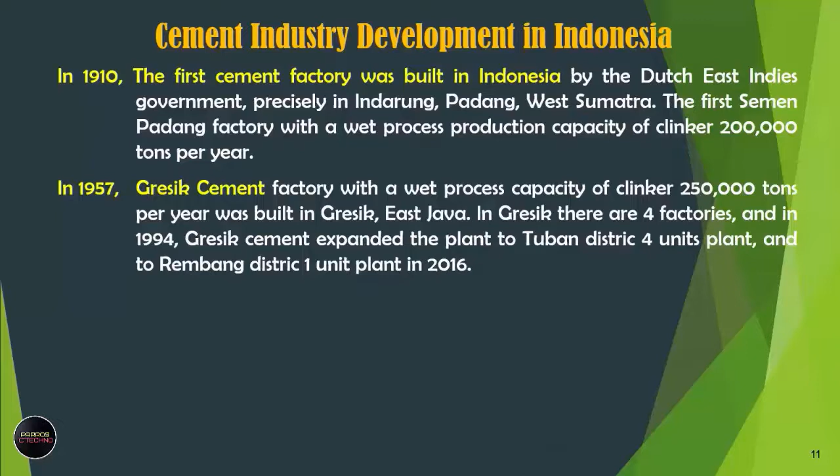In 1957, the Gresik cement factory with a wet process capacity of clinker 250,000 tons per year was built in Gresik, East Java. In Gresik there are 4 unit factories, and in 1994, Gresik Cement expanded the plant to Tuban district with 4 unit plant. And in Rembang district in 2016, 1 unit plant. Currently, Gresik Cement has a total capacity of 11.9 million tons of clinker per year. Meanwhile, the Gresik factory which uses the wet process is no longer in operation.

In 1968, the Tonasa Semen plant with a wet process capacity of clinker 120,000 tons per year was built in Tonasa, South Sulawesi. Currently, Semen Tonasa has 4 unit operating plants with a clinker production capacity of 5.98 million tons per year. The Tonasa Unit 1 with the wet process is no longer in operation.

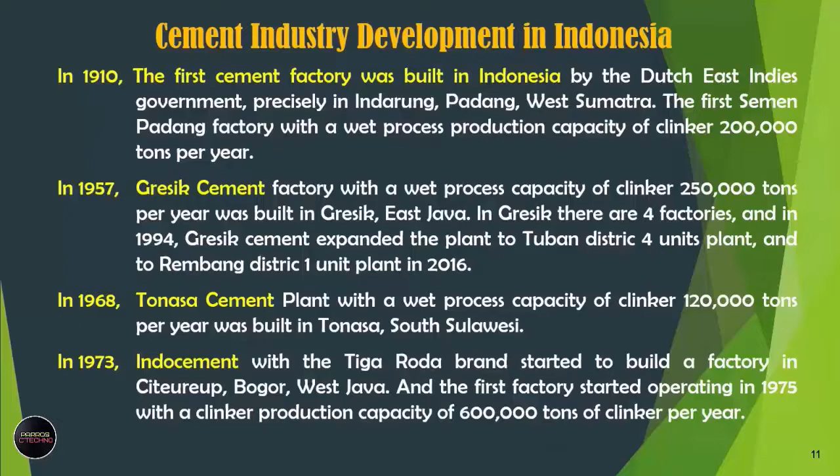In 1973, Indocement with the Tiga Roda brand started to build a factory in Citeureup, Bogor, West Java. And the first factory started operating in 1975, with a clinker production capacity of 600,000 tons per year. Currently, Indocement has 13 unit plants located in 3 plant locations, namely in Citeureup Bogor, 10 unit factories, in Cirebon, 2 unit factories, and in Tarjun, South Kalimantan, 1 factory unit. Clinker's total production capacity equals 18.6 million tons per year. And Indocement has a factory that specializes in producing white cement.

In 1974, the Baturaja Cement Factory Unit 1 was established in Baturaja, with a production capacity of clinker 550,000 tons per year. Then in 2001, it was optimized to 1.25 million tons per year. Baturaja Factory Unit 2 started production in 2017 with a capacity of 1.85 million tons per year.

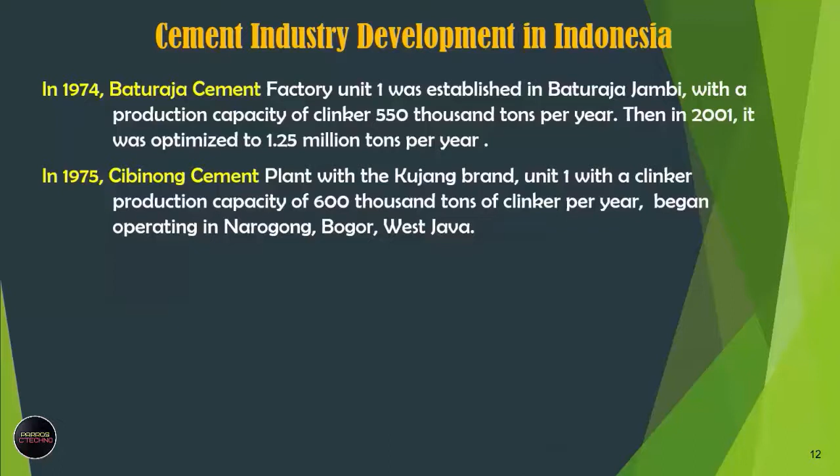In 1975, the Cibinong cement plant with the Kujang brand, Unit 1 with a clinker production capacity of 600,000 tons per year, began operating in Narogong, Bogor, West Java. In 1977 Semen Cibinong acquired Semen Nusantara Cilacap, and in 2006 officially changed its name to Holcim Indonesia Tbk. Holcim Cement has 8 factories in 3 locations: Holcim Narogong 4 factories, Holcim Cilacap 2 factories, and Holcim Tuban 2 factories. Total clinker production capacity is 14.7 million tons per year. And currently Holcim Semen has joined the Semen Indonesia group under the name SBI or Semen Bangun Indonesia.

In 1980, the Kupang cement factory was built in Kupang with an upright furnace or shaft kiln, with a production capacity of 120,000 tons per year. Since 1996, Semen Kupang, which uses upright furnaces, has ceased to operate, and in 1997 built a new factory unit with a rotary kiln, with a production capacity of clinker 330,000 tons per year.

In 1982, the Andalas cement factory was built in Aceh, with a clinker production capacity of 1.6 million tons per year. And in 2004 the factory was badly damaged by the tsunami, then after being reconditioned by Lafarge Cement it only started operating again in 2010. Currently Semen Andalas has joined the Semen Indonesia group under the name Semen Bangun Andalas.

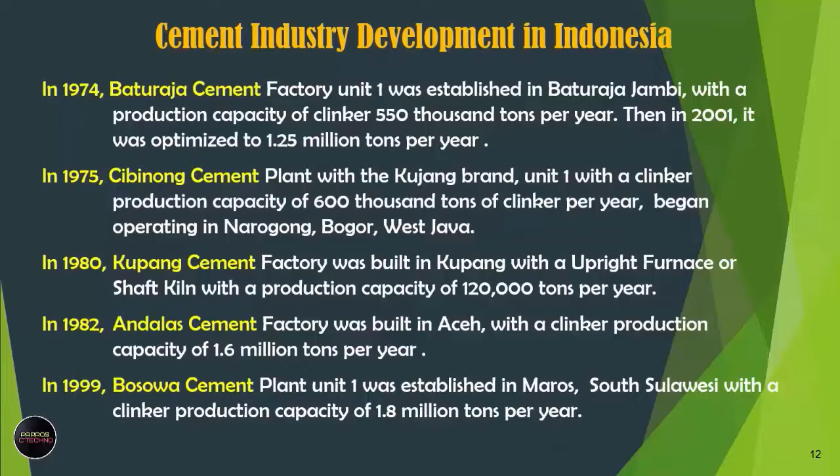In 1999, the Bosowa Cement Plant Unit 1 was established in Maros, South Sulawesi, with a clinker production capacity of 1.8 million tons per year. And in 2014 a factory Unit 2 was built with a clinker production capacity of 2.5 million tons per year.

In 2011, the Juishin Indonesia cement plant under the Semen Garuda brand started operating in Karawang, West Java, with a clinker production capacity of 1.6 million tons per year. In 2014, the Conch Cement Indonesia factory built 2 units of factories in Tanjung Tabalong, South Kalimantan, with a clinker production capacity of 3.2 million tons per year.

In 2015, the Cemindo Gemilang cement factory, with the brand Semen Merah Putih, began operating in Bayah, Banten, with a clinker production capacity of 3.3 million tons per year.

In 2015, the Siam Cement Group cement factory, with the brand Semen Jawa, started operating in Sukabumi, West Java, with a clinker production capacity of 1.6 million tons per year.

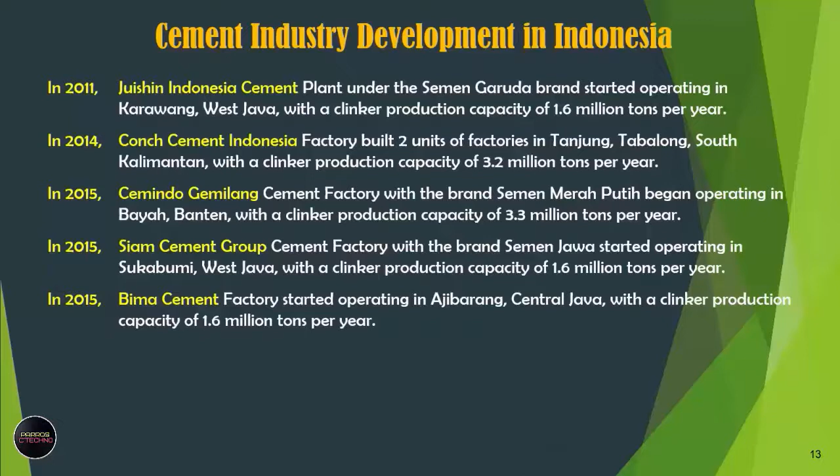In 2015, the Bima cement factory started operating in Ajibarang, Central Java, with a clinker production capacity of 1.6 million tons per year. In 2016, the Indonesia Papua Conch cement plant began operating in Maruni, West Papua, with a clinker production capacity of 1.6 million tons per year.

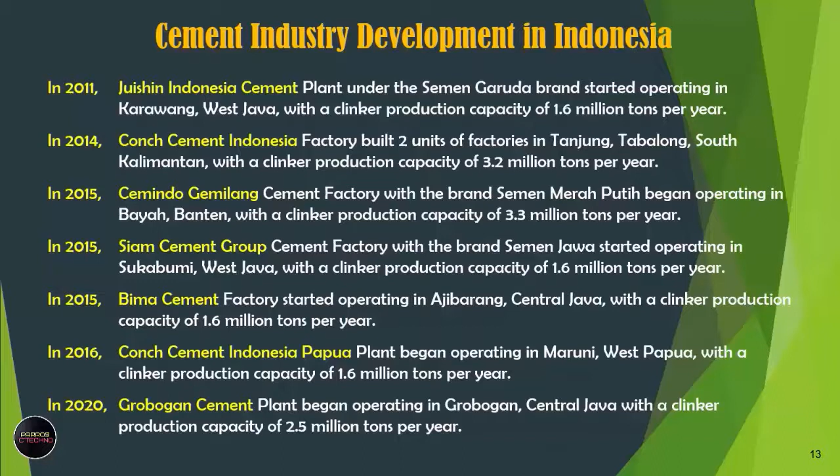In 2020, the Grobogan cement plant began operating in Grobogan, Central Java, with a clinker production capacity of 2.5 million tons per year. Now we will explain the types of cement production processes.

The cement production process, when viewed from the water content of the raw feed, consists of 4 types of processes, including: 1. Wet process, 2. Semi-wet process, 3. Semi-dry process, 4. Dry process.

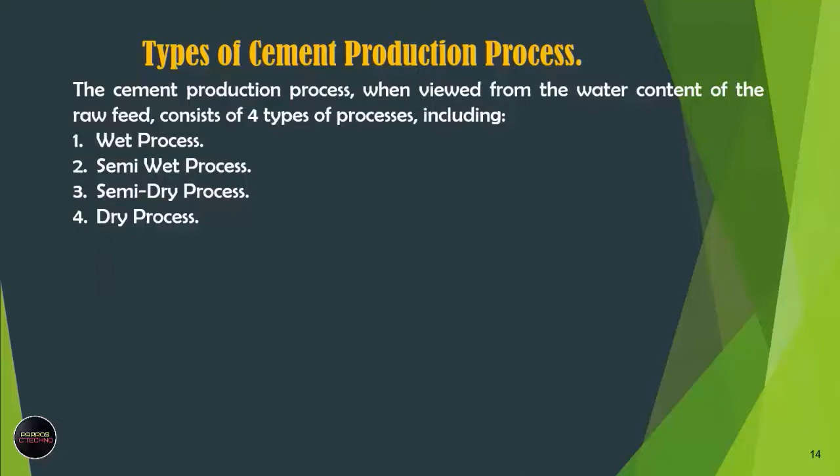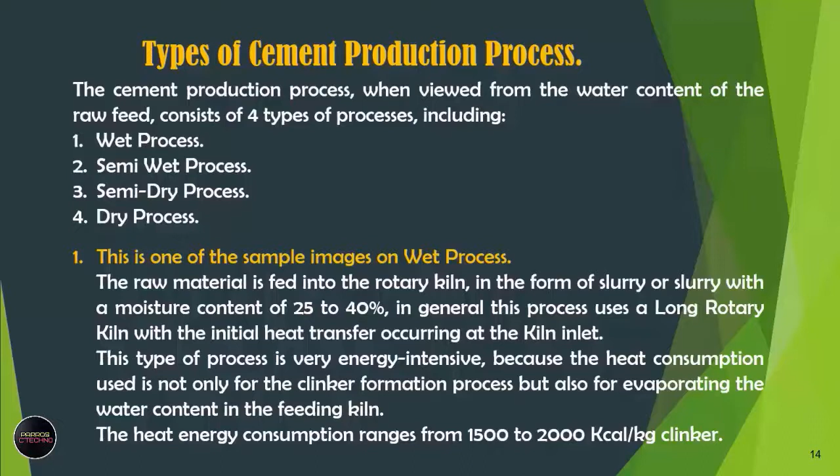The heat energy consumption ranges from 1500 to 2000 kilocalories per kilogram of clinker. The form of the equipment or machine used is still very simple. The residual gas from the combustion inside the kiln exits through the dedusting cyclone near the kiln inlet and is directly discharged into the chimney, where the temperature is still high, between 200 to 250 degrees Celsius.

The production process of this type of cement uses a kiln dimension where length divided by diameter is 33. The advantages of this process are better mixing and correction of raw feed material composition. The kiln feed material, which is sticky and plastic, does not cause significant problems.

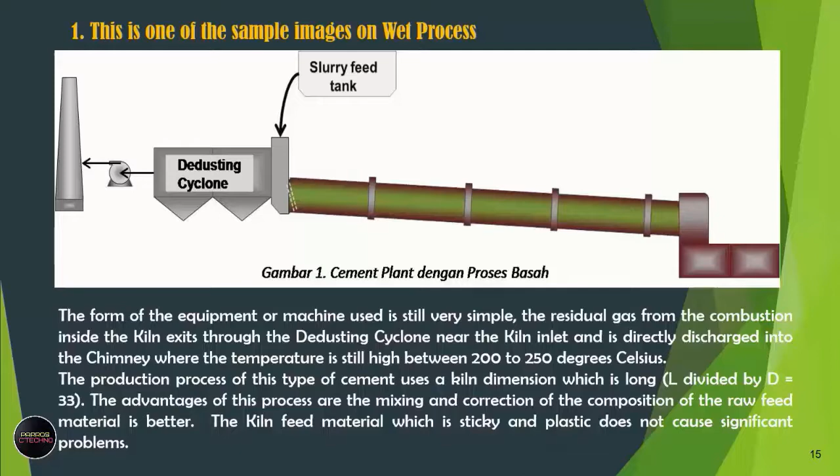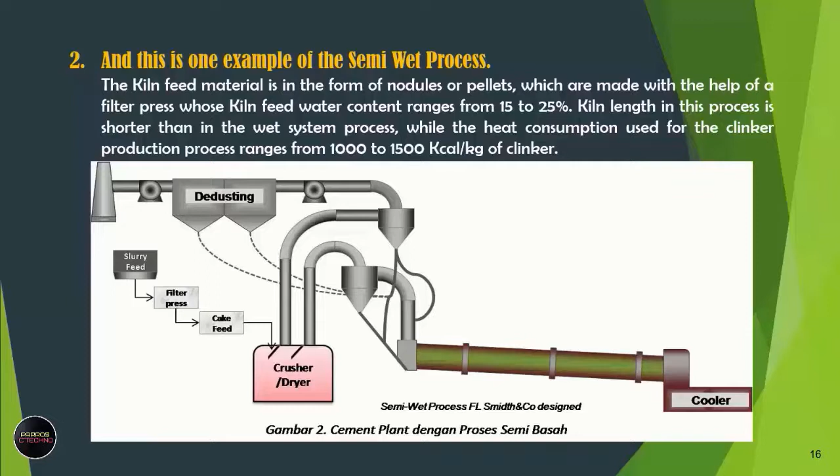And this is one example of the semi-wet process. The kiln feed material is in the form of nodules or pellets, which are made with the help of a filter press, whose kiln feed water content ranges from 15 to 25%. Kiln length in this process is shorter than in the wet system process, while the heat consumption used for the clinker production process ranges from 1000 to 1500 kilocalories per kilogram of clinker.

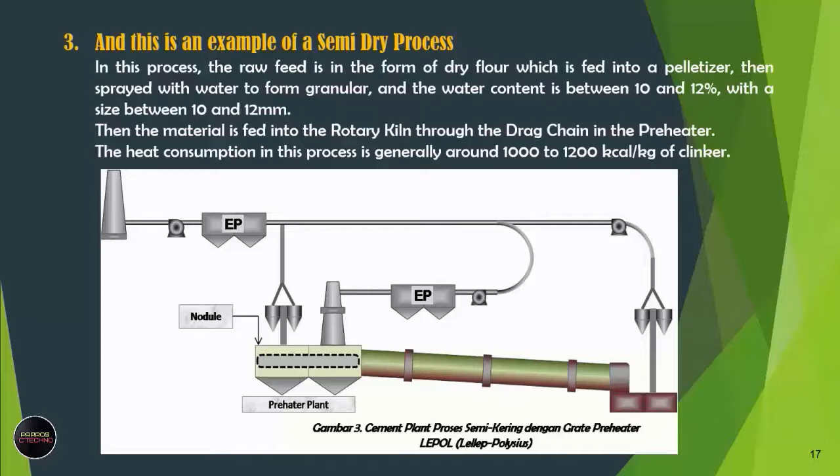And this is an example of a semi-dry process. In this process, the raw feed is in the form of dry flour, which is fed into a pelletizer, then sprayed with water to form granules, with a water content between 10 and 12%, and a size between 10 and 12 millimeters. Then the material is fed into the rotary kiln through the drag chain in the preheater. The heat consumption in this process is generally around 1000 to 1200 kilocalories per kilogram of clinker.

Next, for the dry process. Due to the high heat consumption used for the cement production process in the wet process, semi-wet process, and semi-dry process, cement factory makers are trying to find other possibilities and ways of conducting pre-blending and homogenizing the kiln feed in a dry state, with a water content between 0.5 and 1%.

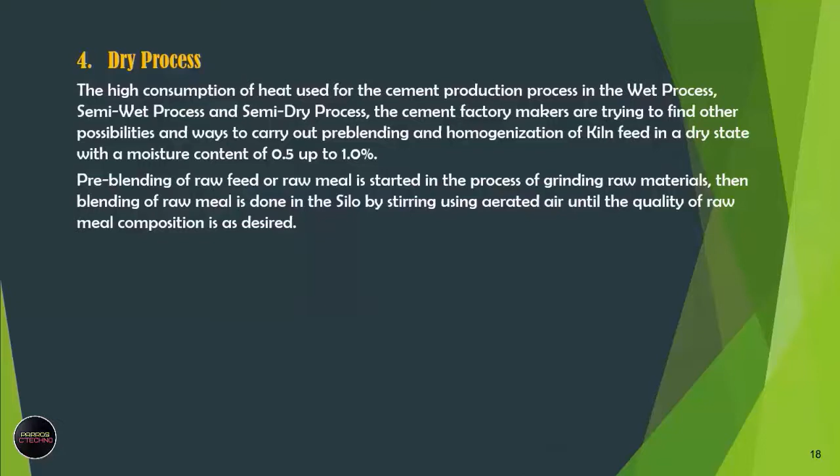Pre-blending of raw feed or raw meal starts in the process of grinding the raw materials, then blending the raw meal is done in the silo, by stirring using aerated air, until the quality of the raw meal composition is as desired. Then the raw meal is suspended into the preheating system, which then enters the kiln.

This preheating system is vertical and stratified, with a fairly high temperature, so that a decarbonization reaction occurs between 30 to 40% for conventional suspension preheaters.

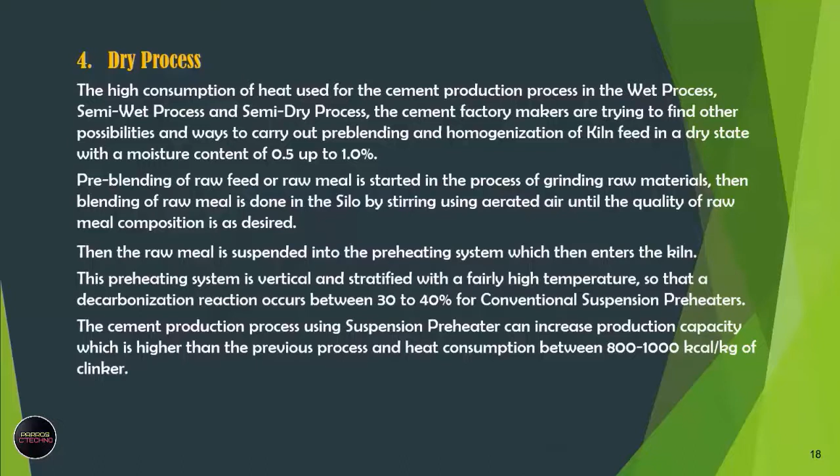Cement production process using a suspension preheater can increase the clinker production capacity, which is higher compared to the previous processes, and the heat consumption is between 800 to 1000 kilocalories per kilogram of clinker. Preheater system.

To increase the production capacity of clinker and reduce its heat consumption, NSP, or new suspension preheater, was developed - a conventional preheater with an added calciner burner, installed with the preheating system with the aim of increasing the degree of calcination to more than 80%.

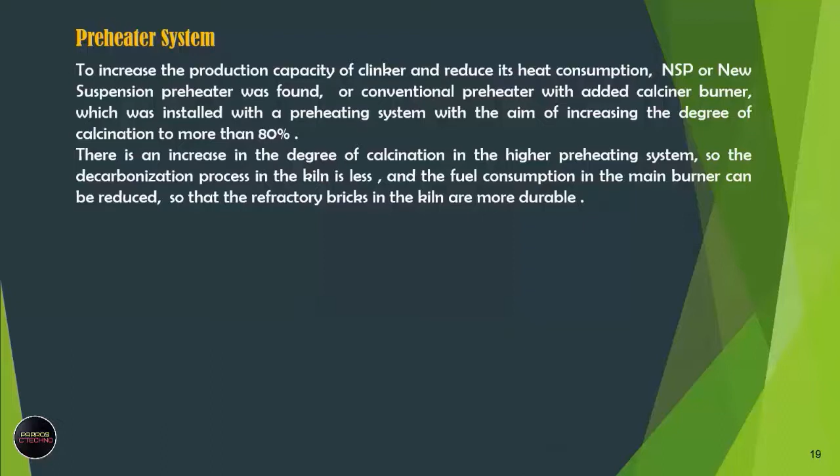With the increase in the degree of calcination in the higher preheating system, the decarbonization process in the kiln is reduced, and fuel consumption in the main burner can be lowered, making the refractory bricks in the kiln more durable.

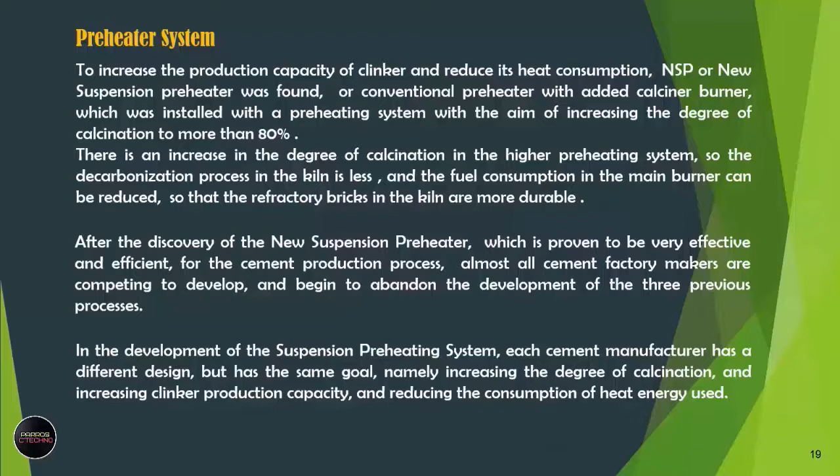After the discovery of the new suspension preheater, proven very effective and efficient for the cement production process, almost all cement factory makers began competing to develop it and abandoned the three previous processes. Each manufacturer has a different design in developing the suspension preheating system, but with the same goal: increasing the degree of calcination, increasing clinker production capacity, and reducing heat energy consumption.

The idea of making a raw meal preheater system has existed since the 1930s. Viewed from the principle of heat transfer, there are two kinds.

First, countercurrent: material is fed from the top and hot gas flows from below. The disadvantage of this method is that the contact time of material and hot gas is very short, making it less efficient.

Second, co-current or direct current: this system generally uses long ducting and a multilevel cyclone. The material flow is fed into the top cyclone inlet duct and then simultaneously meets hot gas from below. With this system, the contact time of hot material and gas is longer and more efficient than countercurrent.

A preheater system with direct flow was first introduced in 1951 by F. Muller from KHD, with a material separation system and a hot gas cyclone of 4 stages.

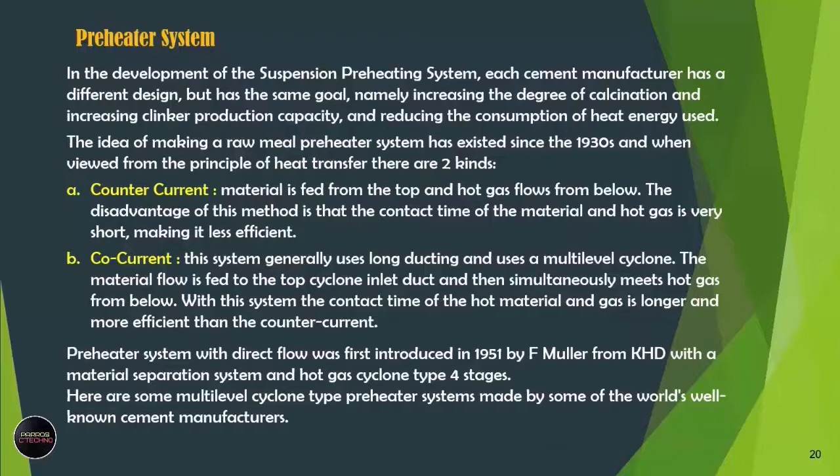Here are some multilevel cyclone type preheater systems made by some of the world's well-known cement manufacturers - types of suspension preheater systems. These are sample images of the preheater system with a 4-stage cyclone.

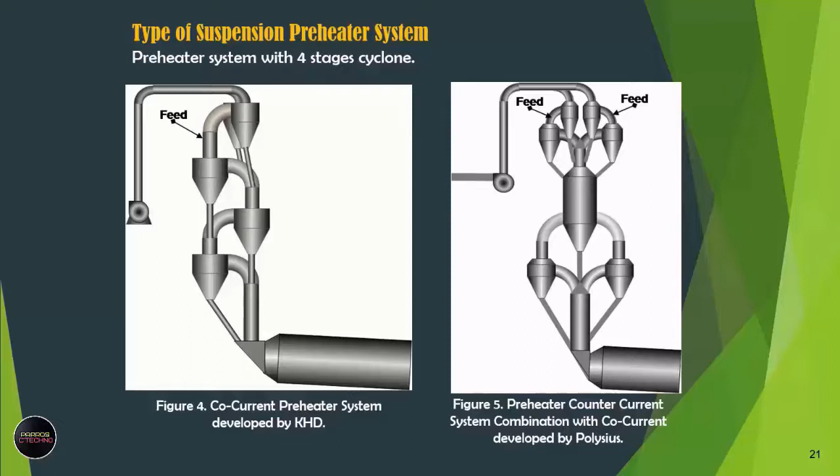Figure 4: direct current preheater system developed by KHD. Figure 5: preheater system combining countercurrent and direct current, developed by Polysius.

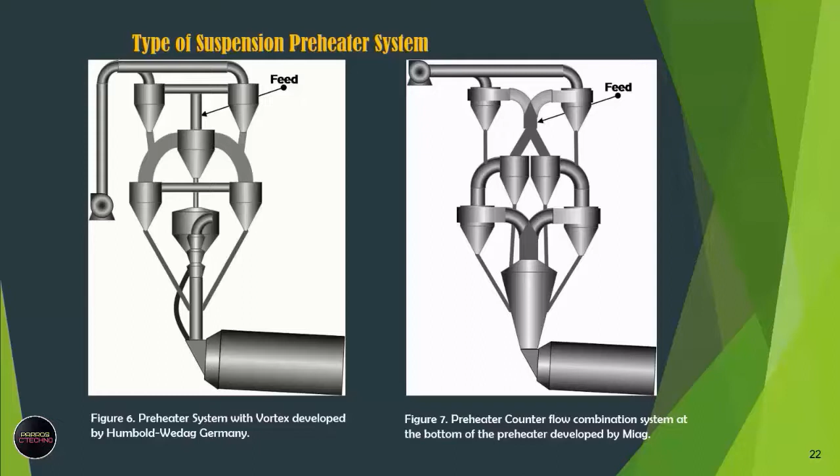Figure 6: preheater system with vortex, developed by Humboldt-Wedag, Germany. Figure 7: preheater counter-flow combination system on the lowest stage of the preheater, developed by Miag.

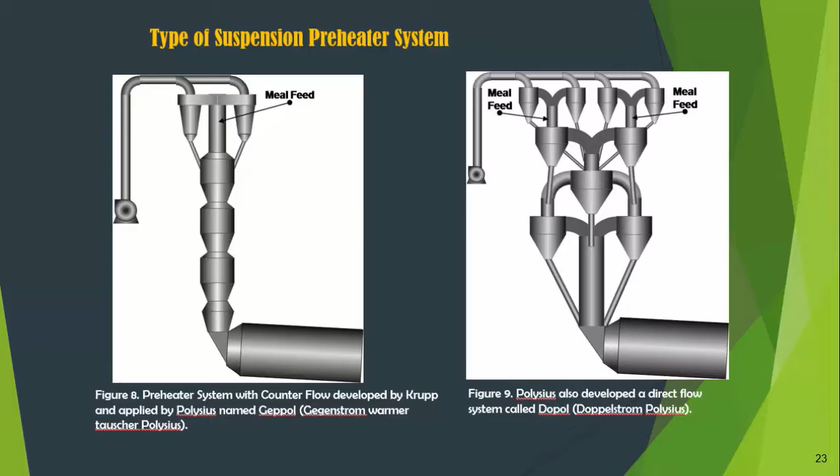Precalciner, or NSP, new suspension preheater, is a development of the suspension preheater equipped with a calciner, or combustion preheater.

It was first applied by the Humboldt-Wedag Company in 1966. Then, since 1970, the trend has been to build cement factories with large capacities using the precalcining system.

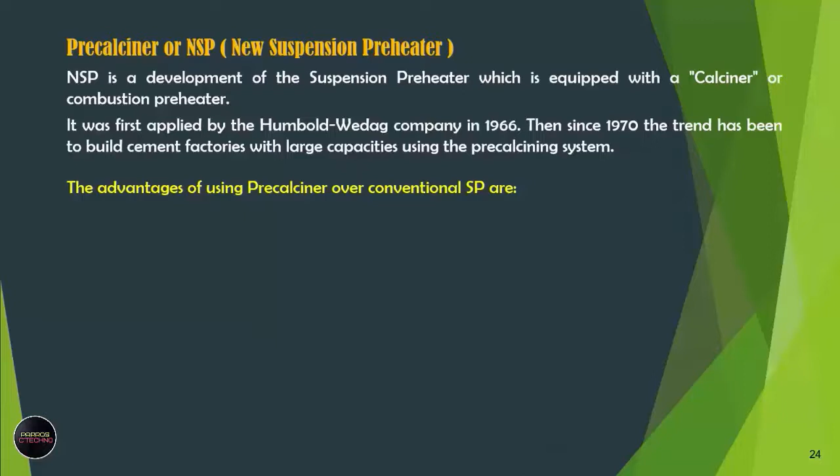The advantages of using precalciner over conventional SP are: first, the degree of calcination in the precalciner can reach 85 to 95%, whereas in the conventional suspension preheater it is only 30 to 40%. Second, it can increase the production capacity of clinker.

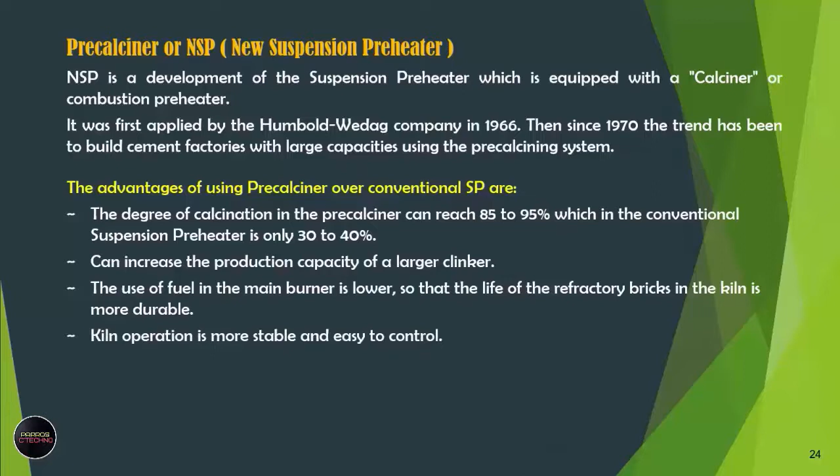Third, fuel use in the main burner is lower, making the refractory bricks in the kiln more durable. Fourth, kiln operation is more stable and easier to control.

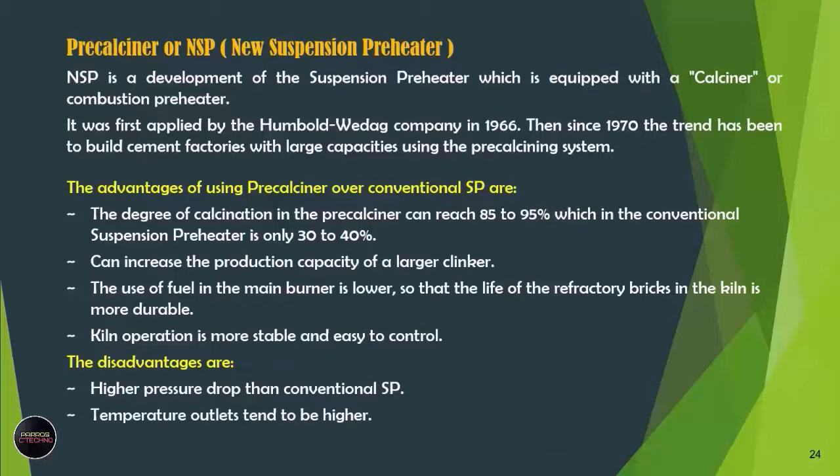The disadvantages are: first, higher pressure drop than conventional SP. Second, outlet temperatures tend to be higher.

In precalciner system development, each cement manufacturing company has a different design, but with the aim of increasing production capacity by optimizing the combustion process and material separation in the preheater system.

When viewed based on the air supply for the combustion process, the precalciner can be divided into two types: first, air-through, or air directly from the kiln - combustion air for the precalciner system obtained only from the air remaining from the combustion process inside the kiln.

Second, air-separate, or separated air - combustion air for the precalciner, in addition to the remaining combustion air from inside the kiln, is also taken from the cooler as secondary air and flowed through the tertiary air duct to the calciner. Of these two types, the air-through system has not been developed much, because the combustion process in the preheater is not optimal.

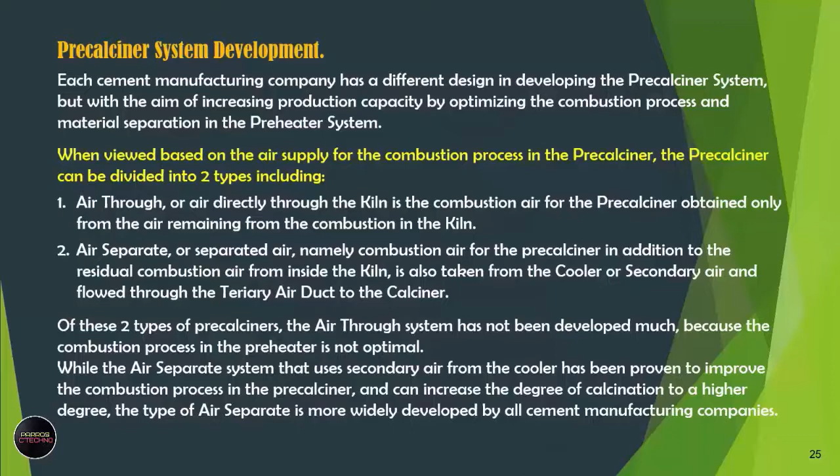While the air-separate system, which uses secondary air from the cooler, has been proven to improve the combustion process in the precalciner and can increase the degree of calcination, the air-separate type is more widely developed by cement manufacturing companies. Here are example drawings of the air-through precalciner system type.

Precalciner system air-through type: in this system, the combustion air in the calciner burner only relies on the remaining air from the internal process in the kiln.

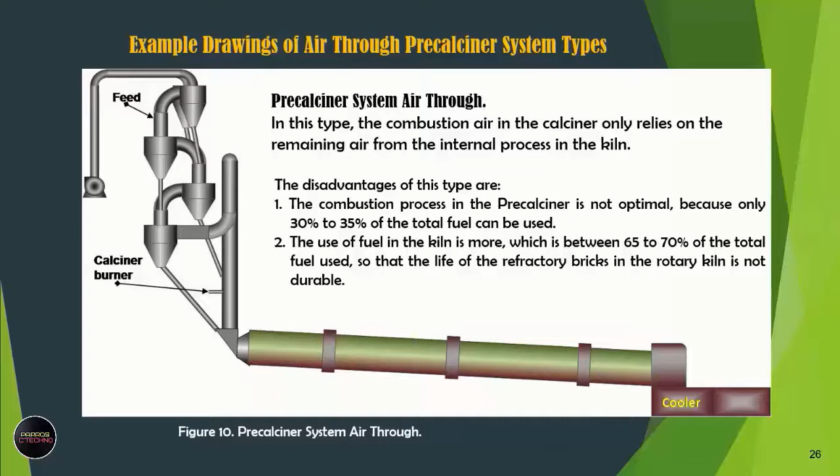The disadvantages of this type are: first, the combustion process in the precalciner burner is not optimal because only 30% to 35% of the total fuel can be used. Second, fuel use in the kiln is higher, between 65 to 70% of total fuel used, so the life of the refractory bricks in the rotary kiln is not durable.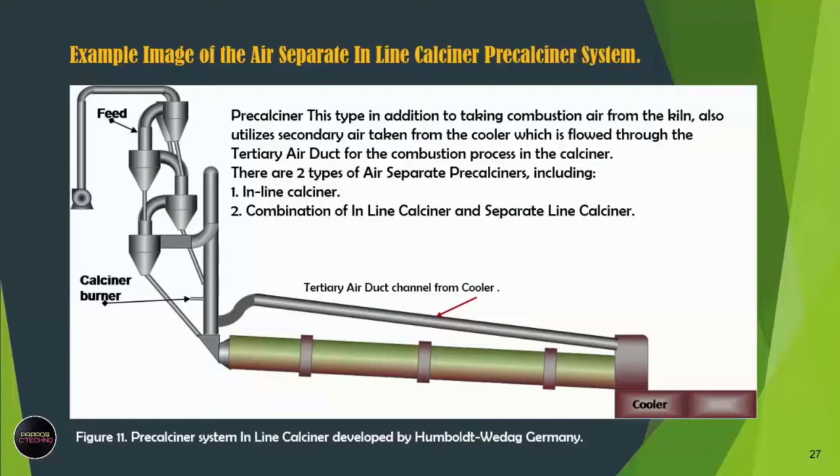There are two types of air-separate precalciners: first, the inline calciner; second, a combination of the inline calciner and separate line calciner.

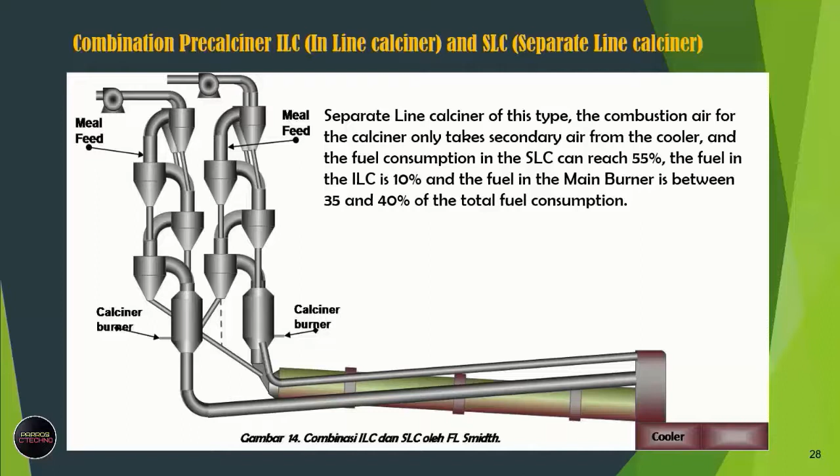Because the use of fuel in the main burner kiln is less, the life of the refractory bricks in the kiln is longer than in the previous type of precalciner system.

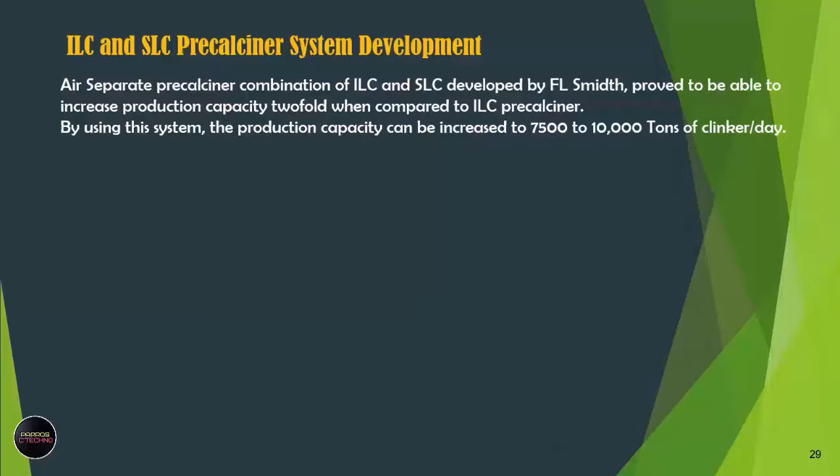Development of ILC and SLC precalciner systems: the air-separate precalciner combination of ILC and SLC developed by FL Smidth proved able to increase production capacity twofold compared to the ILC precalciner. Using this system, production capacity can be increased to 7,500 to 10,000 tons of clinker per day.

This success was also followed by other cement manufacturing industries, such as Kawasaki with KSV, Kawasaki Spouted bed Vortex chamber, which reached a production capacity of 9,400 tons of clinker per day.

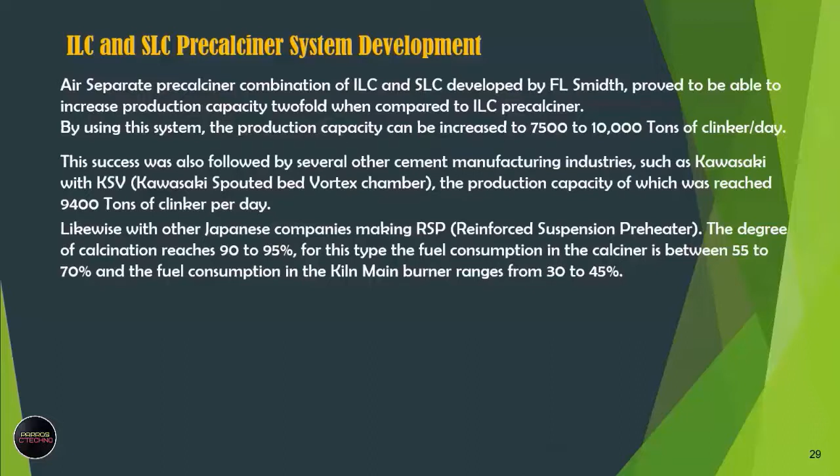Likewise with other Japanese companies making RSP, Reinforced Suspension Preheater. The degree of calcination reaches 90 to 95%, with fuel consumption in the calciner between 55 to 70%, and fuel consumption in the kiln main burner ranging from 30 to 45%.

The combination ILC and SLC precalciner was also developed by Mitsubishi Heavy Industries under the name MFC, Mitsubishi Fluidized Calciner. By applying this combination, besides increasing production capacity, the heat consumption used is very low, less than 700 kilocalories per kilogram of clinker, and the average SP top temperature is less than 360 degrees Celsius.

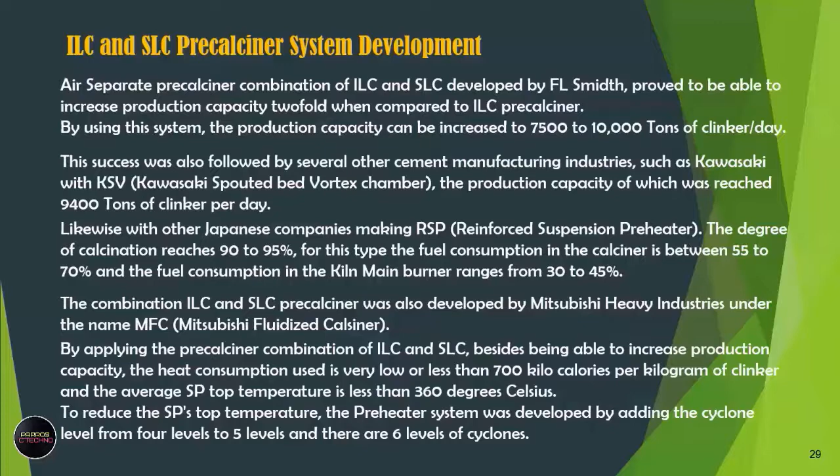To reduce the SP's top temperature, the preheater system was developed by adding cyclone levels, from 4 levels to 5 levels, and there are now systems with 6 levels of cyclones.

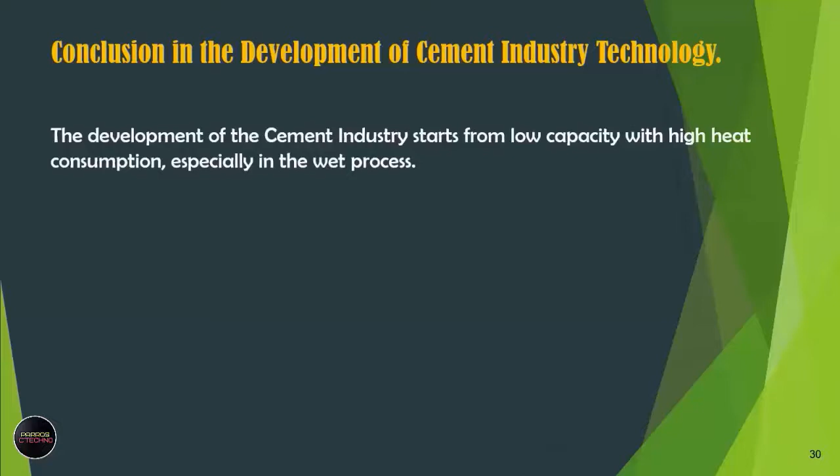Conclusion: in the development of cement industry technology, it starts from low capacity with high heat consumption, especially in the wet process.

Then it was developed with a preheater system for dry processes, starting from the suspension preheater, with the addition of a calciner burner using an air-through system without a tertiary air duct, and further developed with the air-separate calciner using secondary air from the cooler through a tertiary air duct.

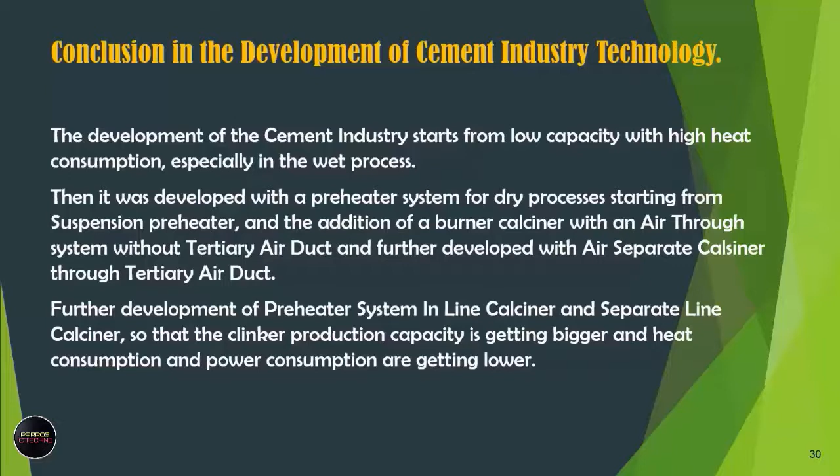Further development of the preheater system included the inline calciner and separate line calciner, and the preheater system was developed by adding cyclone levels from 4 to 5, with some reaching 6 levels of cyclones, so that clinker production capacity increased while heat consumption and power consumption became lower.